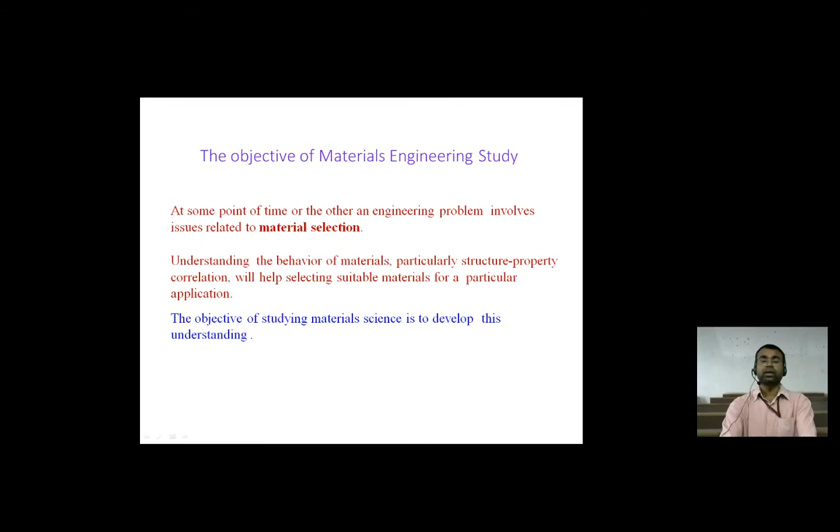So the objective and the scope of the present course: the primary objective is to present the basic fundamentals of material science and engineering, and to expose the reader community to different classes of materials, exploring their properties, their structure and imperfections present in them, and how their properties will impact the working condition of that particular product, how it will maintain the workability of the product in certain conditions and its sustainability according to its working environment. It will help understand the subject with ease by presenting the content in a simplified and logical sequence at a level appropriate for students, teachers and researchers.

Material science is a very vast subject, analyzing from ancient metallurgy to the current IT world, the smart materials we are using, and how that particular material behaves according to the working condition and situation, to maintain the working ability of that particular product.

In the teaching learning process, through relevant illustration, animation with content and practical examples, which I'm telling you as in our previous lectures, how the products which surround us maintain all these things.

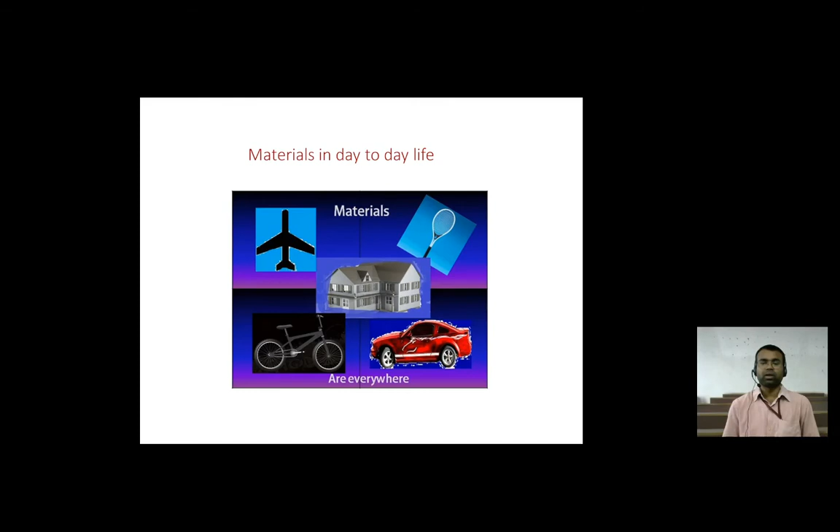If these materials are not appropriate or in their proper places, then we can't use any kind of that particular product in a perfect way. So, what would it be like without the materials?

If you observe, there is a lot of material included in this particular picture, as well as in our life, and we are surrounded by these materials which help maintain our daily life with better prospects.

So for maintaining our daily life, we are creating these kinds of materials to enhance our daily life and make it a better place.

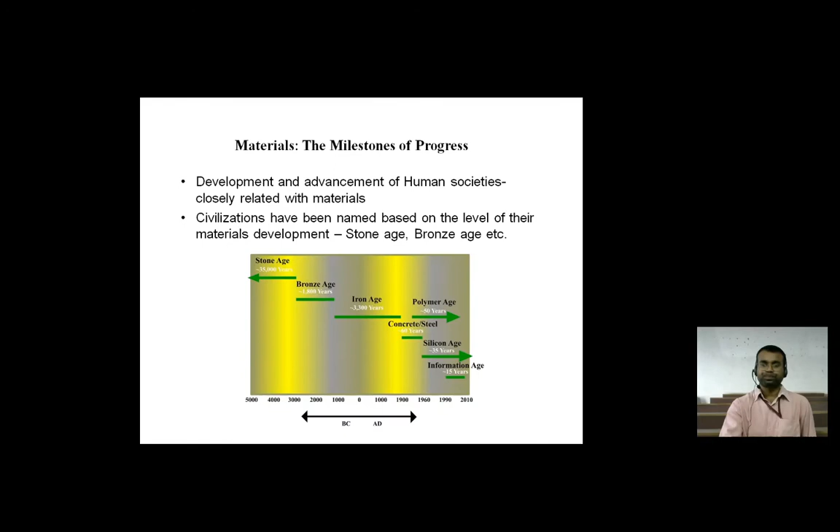So the quest for new materials shows the progress of that particular age, from the Stone Age to the IT age, which we are living in now.

We started from the wood age to the bronze age, and then found that particular material, the metal - cast iron and steel - and then we found aluminum.

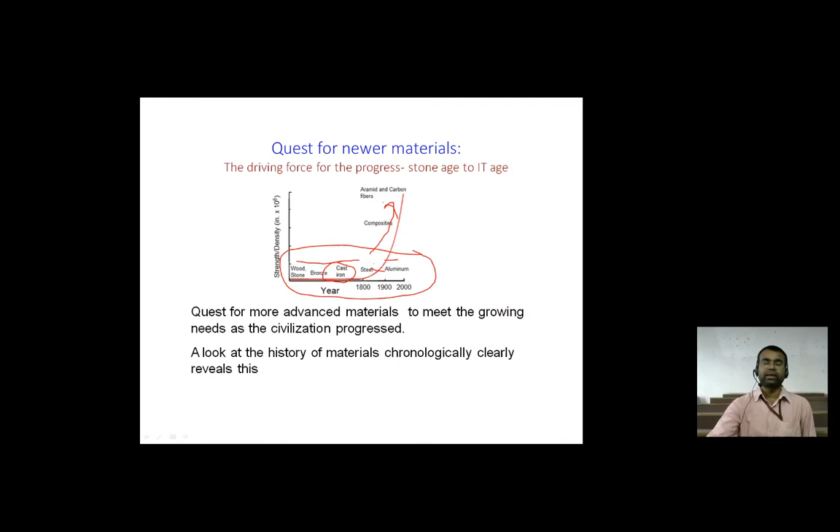Now we are in progressive mode, analyzing and summing up all these particular properties of different materials into a single material, which is called the composite materials - the advanced materials.

As per the requirement, we are including a lot of properties of different materials in a single material to make a perfect product.

So as per the requirement of the product, as you can see, there is a lot of experiment and a lot of innovation happening.

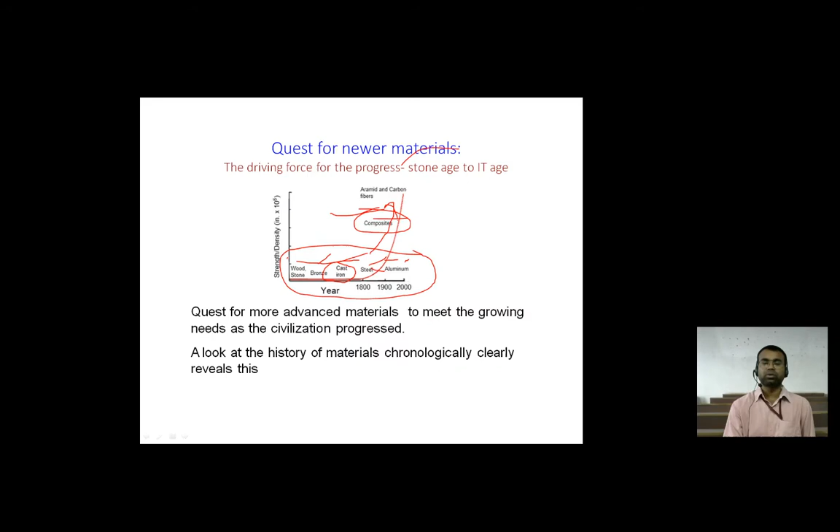So nowadays we have reached a level where we combine materials to make an all-rounder material that works on every aspect, or most aspects, of material properties, fulfilling them in a single composite material to make a perfect product.

Starting from the Stone Age, people lived in caves and hunted with stone-made weapons because at that time stone was the only material available. The starvation faced by human beings led to sustainability in mankind and generated ideas to use that material for their well-being and living.

They started hunting with stone-made weapons for survival, and then came the discovery of fire. All civilizations then turned and took place in a new era. That is said to be the most significant discovery in human civilization - when we discovered fire, we discovered a new era of human being.

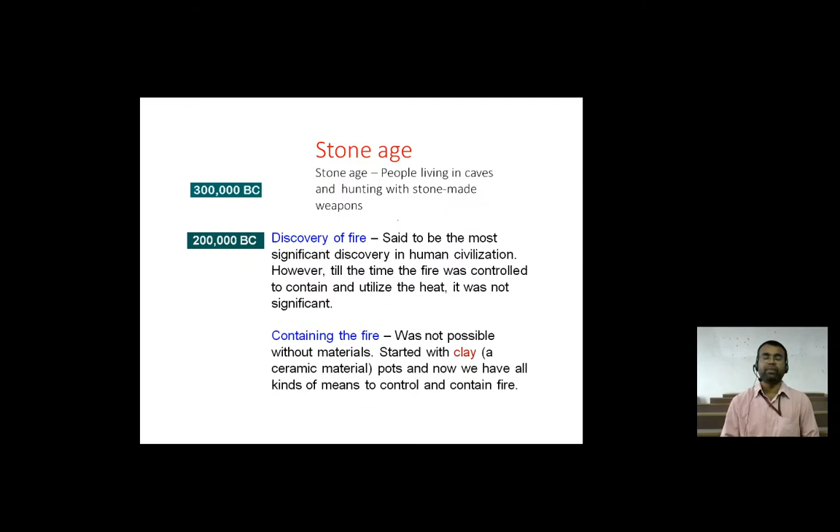However, until fire was controlled to contain and utilize the heat, it was not significant. Containing the fire was not possible without material - obviously it is not possible without any kind of material. So it started with clay or ceramic material, pots, and now we have all kinds of means to control and contain fire.

With the introduction of metal, we move to the first metals discovered: copper and gold. These are still very precious materials which we use, but they have certain limitations regarding their properties.

So humans started searching and inventing to develop better materials. Material processing, annealing and shaping - throwing copper into a campfire and hammering in earlier days. Then melting and casting of metal, melting gold to give it different shapes.

As we discovered fire, it led us to create different kinds of shapes and types of material - to change the shape and size of material by melting it and giving it a different shape according to a die or cast.

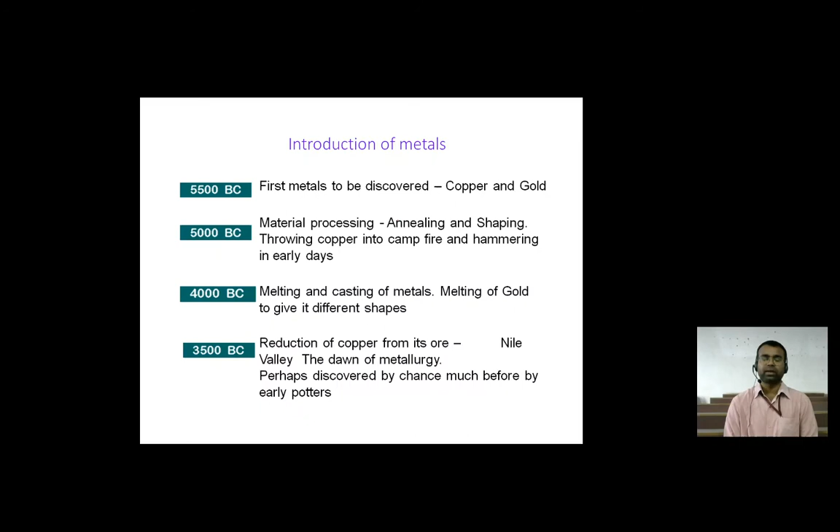The reduction of copper from its ore in the Nile Valley marked the dawn of metallurgy, perhaps discovered by chance by earlier potters. This led to the discovery of alloy metal combinations.

The discovery of this new kind of metal combines the properties of different metals into a single metal - known as an alloy. The discovery of alloy, a combination of metals, involved mixing tin with copper.

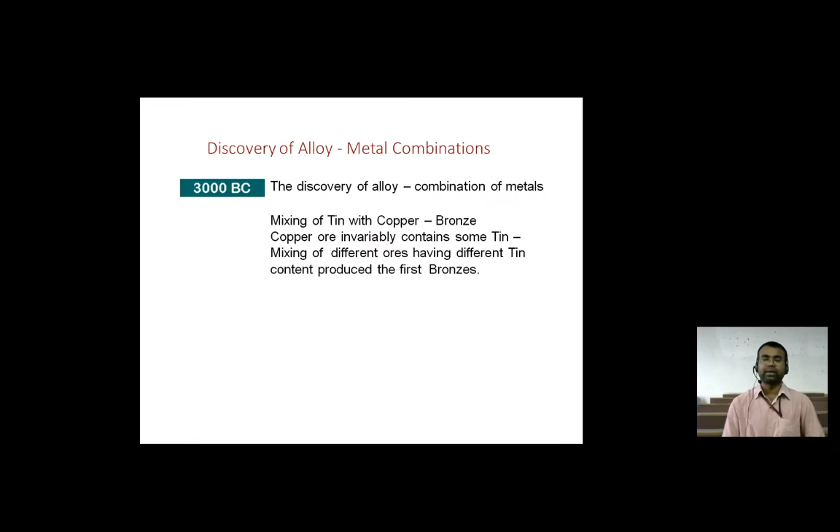Bronze: copper ore invariably contains some tin, and mixing different ores with different tin content produced the first bronze. This is how mixing two particular materials created bronze, a new material.

The alloys started working. So we invented the iron wheel - the discovery of iron making brought a revolution in warfare and cultivation, establishing human beings to live for the best.

For the better age, and then how it proceeds - with warfare and cultivation came the invention of the blast furnace, and the production of pig iron from ores was invented.

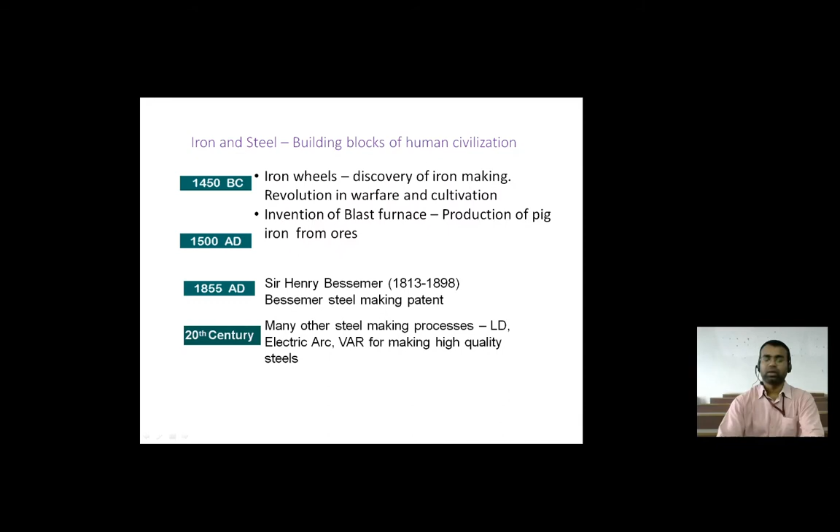The Hall process - what is the Hall process? The Hall process is an electrochemical process for extraction of aluminium from alumina, Al2O3.

This brought a revolution in transportation, changing the world through rolling wheels, traveling into the sea, or traveling in space or in the air.

The discovery of the automobile and aeroplane started in 1890 and 1910, from where mankind took an elevation for their progress with the help of these materials.

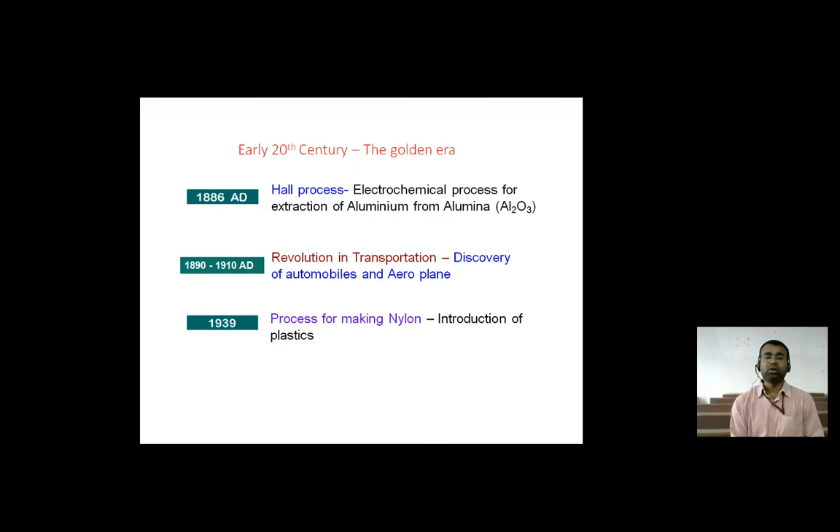In 1939, the process of making nylon and the introduction of plastic led to an era which we are still facing as a kind of problem, but we will discuss how to manage it.

Zone refining, a metallurgical process to produce ultra-pure silicon, gave us the silicon chips, the heart of electronics, with smaller and smaller silicon wafers. Miniaturization was taking place in the 1960s.

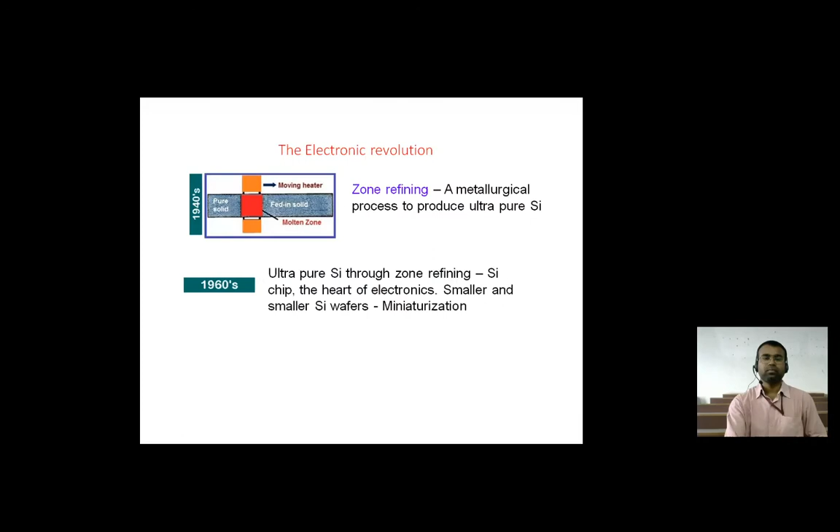As we started inventing materials, that progress led to high temperature ceramics, superconductors, MRI machines, brain scans, and advancements in medical science. All this is happening because of superconductors, such as magnetic levitation trains having a speed of 300 to 500 kilometers per hour.

That maglev train faces a very high velocity of air, and the material used needs to be of a quality that can sustain the impact of that air while traveling at 300 to 500 kilometers per hour. This shows how material analysis and material requirements are essential during the making of any product.

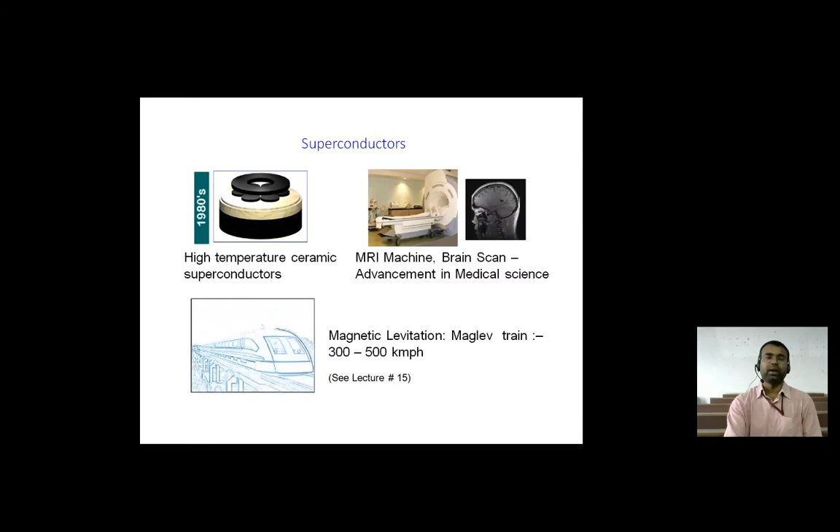The impact of materials on progress and the revolution in transportation: road transport in the 18th and a major part of the 19th century was mainly horse carriage based. By 1890, we had included copper, bronze, iron, steel, aluminum and rubber in addition to wood, which had more advanced properties compared to wood.

This paved the way for a series of inventions leading to a paradigm shift in road transport, from horse carriage to motorized vehicles, as we introduced various kinds of materials.

Karl Benz in Germany came up with a viable motor vehicle called the Velo in 1894, and Ford Motor made the first assembly line for mass production of commercial vehicles. The Ford Model T was the first successful and affordable commercial vehicle. That is how mankind started the transportation work.

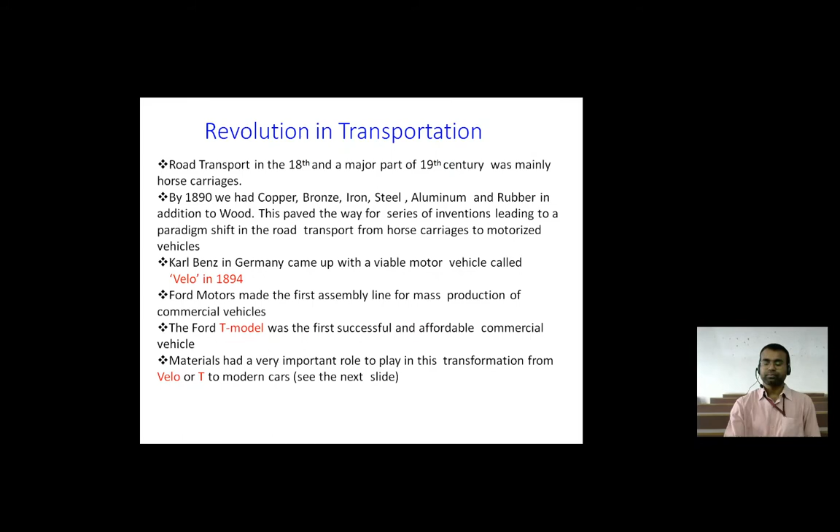Materials had a very important role to play in this transformation from the Velo or Model T to the modern car. That is how materials evolved to create these kinds of automobiles. We have come of ages, developed new materials and technology based on them, and the application of these materials has led to modern day cars.

In cars nowadays we are using different kinds of materials. Why this kind of material? We have ferrous metals and non-ferrous materials used for the body, for the wheels, and for the battery to provide charging and starting of the vehicle.

Rubber is used in the tires, plastic is used on the steering wheel and in the interior cabin of the car. Polymers are also used for making it lightweight. Fluids are used to maintain fluidity between machinery parts to work properly, and electrical parts provide the lighting system for working in the dark. Carpets are used in the interior portion of the car, along with tires, glass and other materials. Including all these materials, we have created a better kind of transportation: the car.

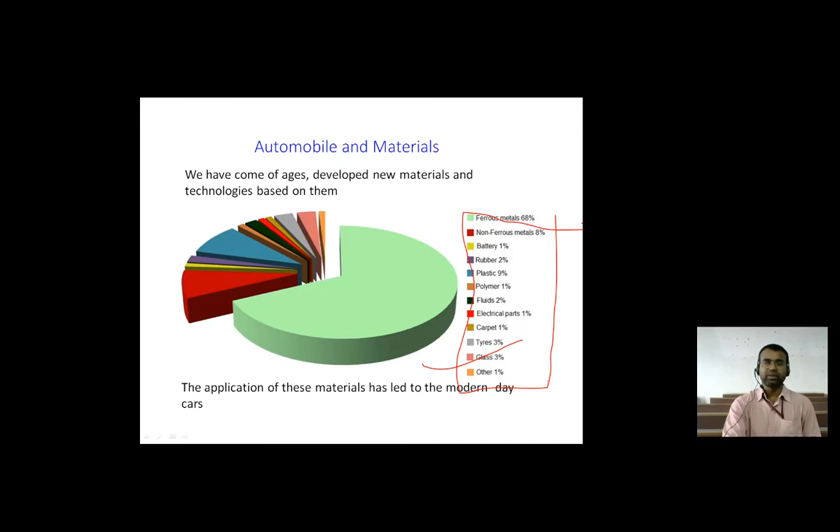In a car we have these different kinds of materials included. Nowadays we also have composite and smart materials which we are utilizing. You can observe how many types of material we use in a single product, just to make that product perfect. With the help of these materials, we are improving the automobile sector.

We are talking about the various kinds of materials, where they are utilized in the automobile, and the role of these materials. The engine, both the outer area and the interior of the car, was made using these kinds of materials. From cast iron blocks to more compact, lighter and powerful engine blocks, material development has made it all possible.

So that is all possible for making an engine block by this particular material. Engine components are traditionally made from ferrous alloys, and other metal components are made by different kinds of ferrous alloys, not only cast iron. So as per the requirement of the product, material selection takes place, and this material science is based on the requirement of the working condition of that particular metal or product. We select the particular material for better working in that particular environment.

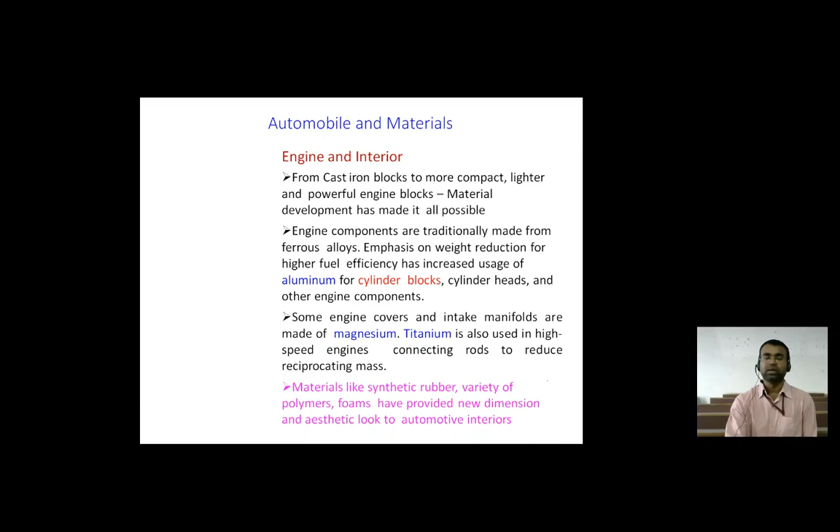In continuation, from the invention of the airplane with the Wright brothers in 1902 to today's aircraft, material played a very important role in this case also. At that time, composite material was not available. As you can see, the use of advanced material is stronger, lighter, with better aerodynamic design and greater speed.

So if we are traveling in an airplane, you can observe how much weight that particular airplane is carrying. For maintaining the weight, better aerodynamics, speed, and fuel consumption, there are lots of points to be considered. We improve the design of the airplane by replacing various kinds of materials for making better products.

So the Boeing 777, for example, uses 75% aluminum, whereas the advanced version, the 787, uses half the material as fiber reinforced composite. As you can see, the 75% aluminum used in the Boeing 777 is now replaced in the advanced 787 version, which means the composite includes various properties of materials replacing those from the 777.

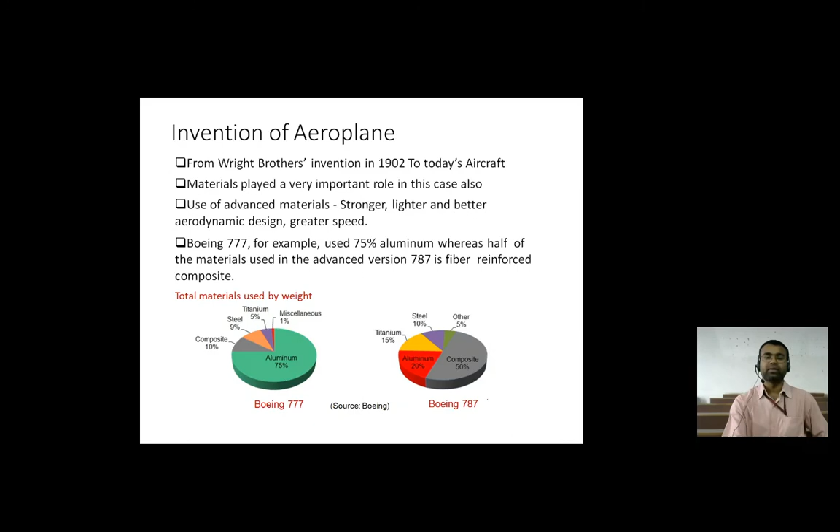As you can see from this chart, in the 777 aluminum was 75%, and now it's reduced to only 20%, with 50% composite by weight. The composite material is introduced while maintaining the quality of the product, maintaining stability and durability, and enhancing the working condition of that particular product. So that is how improving and requiring advanced materials is necessary for making products.

So the impact of that material, how it works: as aircraft design improved, the load on the engine and hence its operating temperature also increased. As I said earlier, the replacement with composite material, taking various properties from that material, also helps reduce the weight of the aircraft, by which the loading capacity borne by the engine and the heating of the operating system will also reduce. This will reduce fuel consumption as well as other necessary points.

So that is how we require specific materials as per the requirement of the product. As we discussed in the beginning, for making any kind of product, material selection is very important. And material selection is not only important for creating things, but with that, we need to create that kind of material that, when decomposed into nature, will enhance nature, not harm it.

We human beings are in too greedy a position, just harnessing and digging up various materials which, after replacing the old material, totally work as waste and are decomposed in nature. That is wasting the nature of Mother Earth.

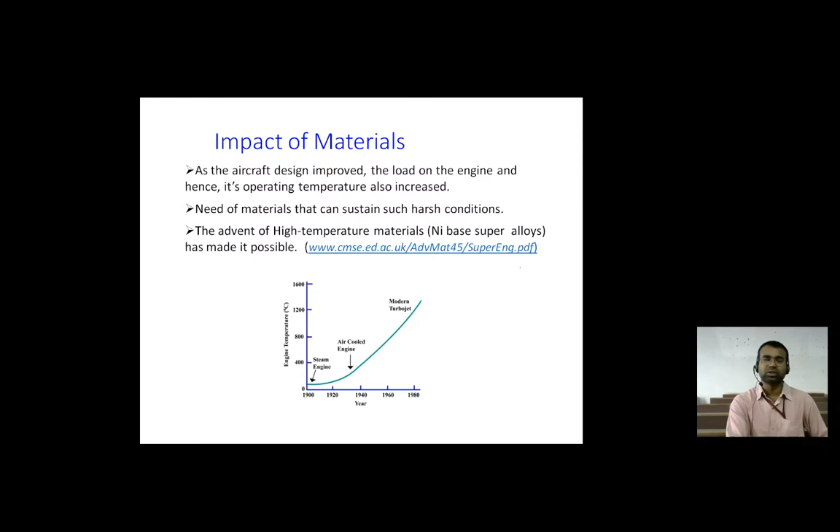So the advent of the high temperature material, nickel based superalloy, has made it possible. For high temperature working, that particular nickel based superalloy is made. As you can see in this graph showing the steam engine, the air-cooled engine, to the modern turbojet engine, it is just happened because of the use of particular materials.

That is how material impacts designing such kind of engines or products for making better products and better work. So as we talked about airways, now we are talking about waterways, the transport and safety, the RMS Titanic, a classic example. We talked about road side and air side transportation, and now we are going to discuss the sea side transportation system and their safety, by which we are utilizing lots of things.